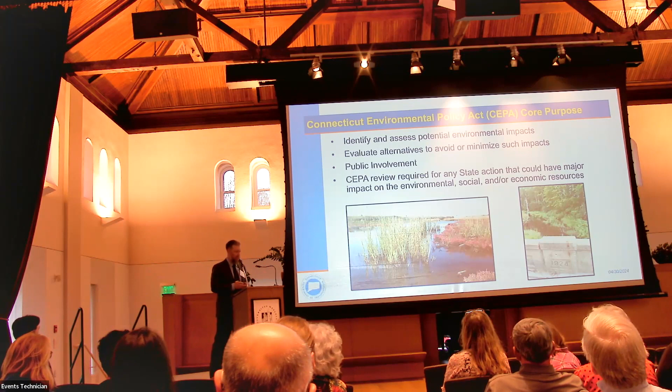All right, so we are here to talk about the removal of the traffic signals on Route 9. This is a public informational meeting. The idea here is to educate the public, but there's something else as well. It's a CEPA scoping meeting, which is the Connecticut Environmental Policy Act. The purpose of this CEPA scoping meeting is to identify potential environmental impacts, evaluate and minimize such impacts, involve the public, and then these reviews are required for any major state action in the state. Some of the impacts we look at are physical, natural, and socioeconomic, such as stormwater, wetlands, recreational resources, pretty much the gamut of issues here.

So again, it's the process of gathering information.

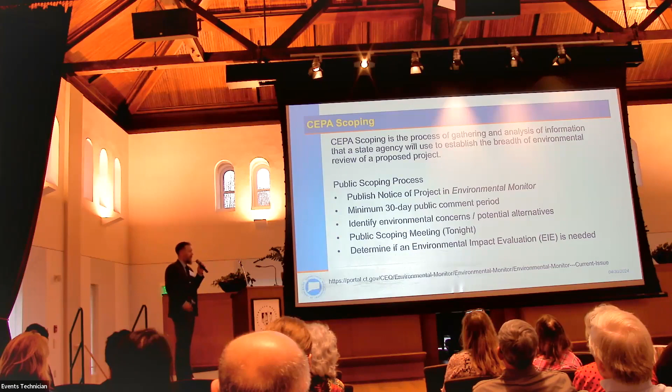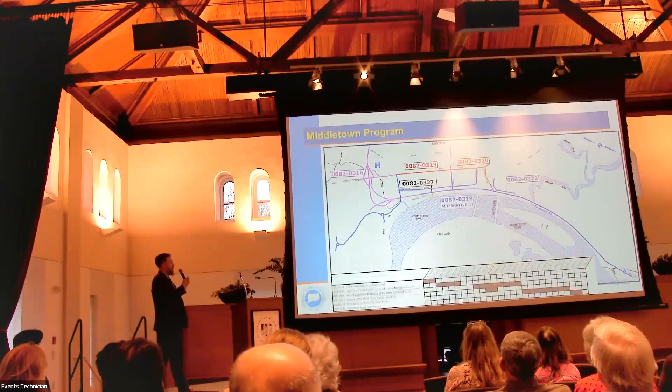So we have a lot going on in Middletown, and have for quite some time. What you're looking at here is all the projects we've had since 2019. Starting with 82319, the red project on Main Street, the sidewalk bump outs on Main Street. We then moved on to 82320, St. John's Square, where we fixed some geometric issues and on-street parking up in the north end. 82316 is under construction right now - that's the Route 17 on-ramp to Route 9 North. What's also just beginning is 82322, the closure of the Miller Street access to Route 9. And what's left is 82318 alternative 11 - a little larger than what you've seen before. Based on our outreach, we've added some limits, including a roundabout further south at Silver Street and a roundabout up north in Cromwell that I'll get into. Below is a quick schedule showing what we've been doing over the years and how we're projecting it out. We're in the middle of construction on the reconfigured Route 17 on-ramp, and hopefully, based on support, this project would follow on the heels of that.

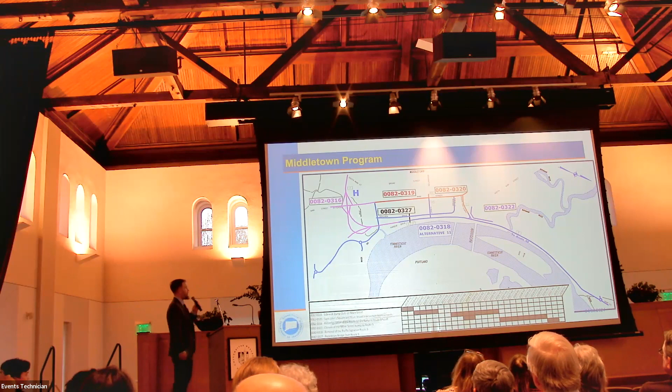So who is the team? My name is Steve Hall, I'm the project manager for this project. I've been on Middletown for 8 years, and was the primary designer for all the projects I just listed, so I've been working on this for a long time. I've lived in the area - I used to live in Middletown. Everyone else you see up here is also part of the team - local people who have been on the job for a while. We've got highway designers and traffic engineers working together. If you see any of these people later on, please feel free to grab them and ask a question.

So what's the purpose of this project? The purpose is to improve safety and reduce congestion on Route 9. The project is needed because the two traffic signals on Route 9 contribute to a crash rate significantly higher than adjacent segments of freeway. There are a couple constraints we have to keep in mind: the proposed design cannot cause regular backups onto Route 9 or cause adverse effects to Main Street. So the goal is to improve safety by removing those signals, but that can't be at the detriment of Main Street or downtown.

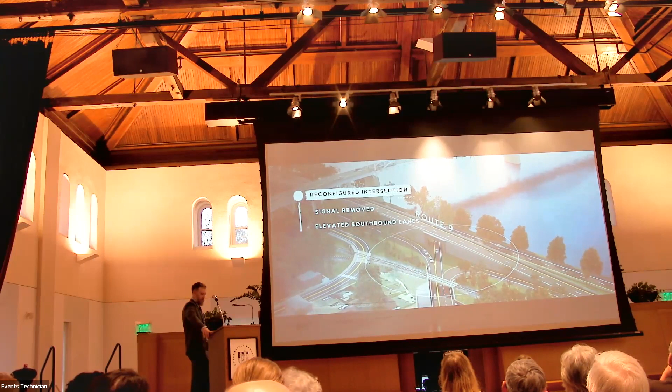Drivers entering northbound Route 9 from St. John's Square will be afforded plenty of time to accelerate to highway speeds, with a new lane extending all the way to Route 99 in Cromwell.

Throughout the network, these design enhancements work together to improve safety for all users, reduce congestion, and create a more efficient downtown. This project, and others like the new pedestrian bridge, will allow a growing Middletown to reconnect with the riverfront and destinations beyond.

All right, so that's the long and short of it, right? But there's a lot more to it. So taking a look at River Road at Route 9, the northbound off-ramp from Route 9. What we're looking at today we'll call this existing, right? This is the construction project under construction right now, this Route 17 on-ramp to Route 9 North. So for all intents and purposes, this is our future existing condition.

What the proposed design will do is add a new alignment off-ramp from Route 9 northbound that will intersect in a three-leg roundabout onto River Road. This roundabout is sized properly to handle any size highway vehicle. It does a tremendous job of naturally reducing speeds and improving safety. I encourage you to look at some of the roundabout information we have elsewhere in the room.

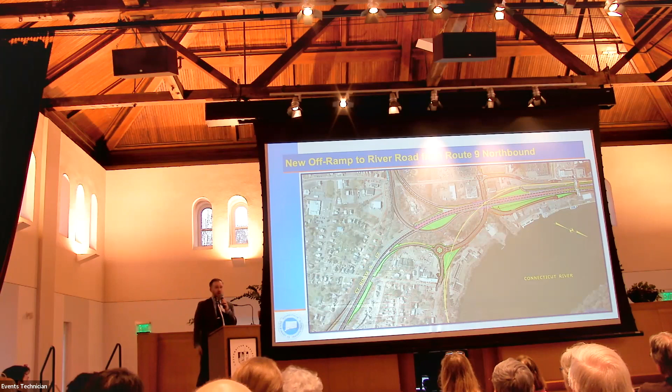From here, we will prioritize the movement off of River Road. There'll be no more stop sign at Harbor Drive, excuse me, there'll be a free flow movement up to Union Street. At Union Street and DeKoven Drive is where they can take a right to go down DeKoven to Rapallo, over the bridge. They can take a right to go DeKoven and Washington to go west, or they could go up to Main Street and use that route as well.

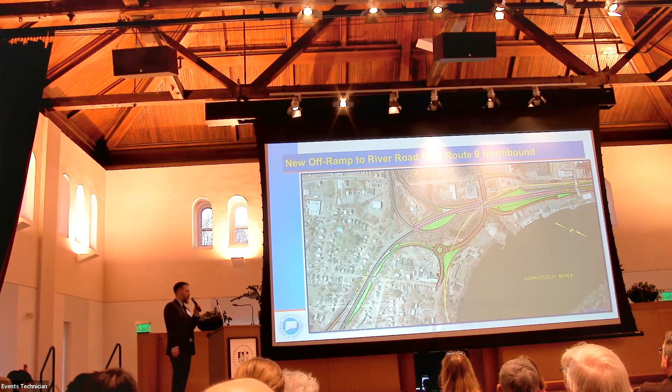This is in a floodplain. The majority of the roundabout is in a floodplain. I'll get into that a little bit later, but there is some mitigation we have to do because of that. And here's just a shot of that rendering.

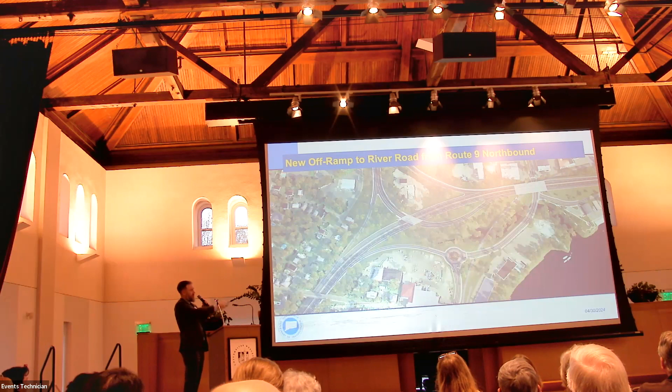So you see we have one rail crossing at the approach coming in from River Road. We've talked to the railroad about this. We've added a second pedestrian crossing actually as part of the construction project right now over that rail crossing to try and encourage and improve the pedestrian connectivity to the riverfront, especially with the development along Harbor Drive there.

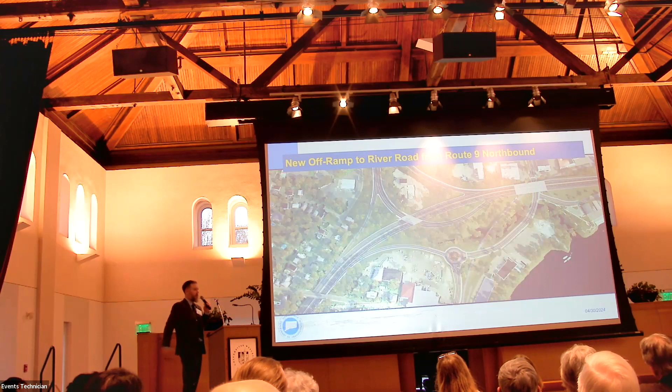As we move a little bit further north, we're looking at the intersection of Washington and Route 9. The area to the left would be part of the current construction project. What we have today is a traffic signal on Route 9, a traffic signal on DeKoven, access from Washington to Route 9 South and from Route 9 North. There's currently no access from Washington to Route 9 North.

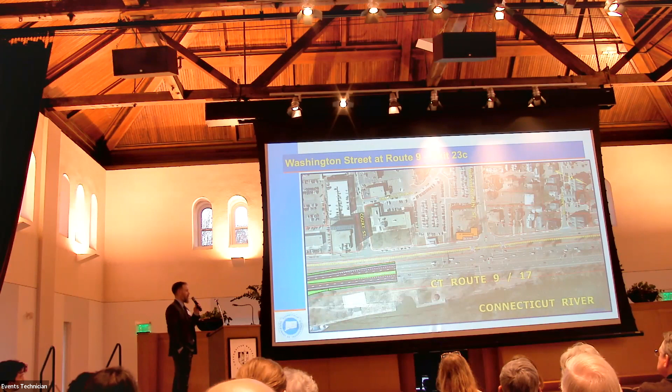We also have a very large rail crossing. There's not a whole lot of movements that cross this today, however the railroad is always talking about increasing operations, and with that wide crossing, it's rather dangerous and becomes a challenge for operations.

So the proposed design here is rather simple. This would be removing that traffic signal at Washington Street. Previous iterations of this design had Route 9 southbound elevated in this region to get Route 9 north underneath. By adding that access further south at River Road, we no longer have to elevate Route 9 southbound. We're now sending vehicles further south to get off of Route 9 north.

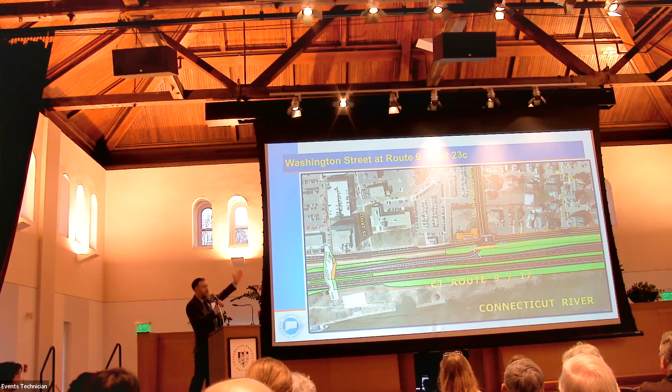So today, cars would take Washington, maybe take a left to go to 66. Now they're going to get off a little bit earlier and take River Road to Washington Street. So this is dramatically simplified. We've tremendously shortened the crossing distance for that rail crossing, and we've maintained that on-ramp from Washington Street to Route 9 southbound. You also see here the pedestrian bridge.

It's an initiated project that has a lot of design work to go, but we've been talking to the city already about how this fits into the downtown area. So more to come on this later.

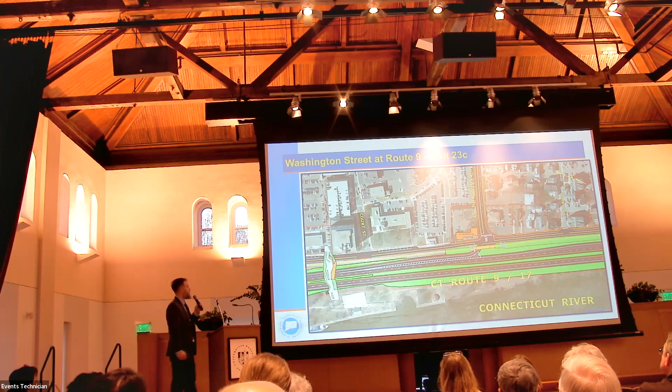And here's that rendering, just showing how much we've simplified the operations. Again, everything is going to be at grade. There's no grade separation for Route 9 south or north of this location here.

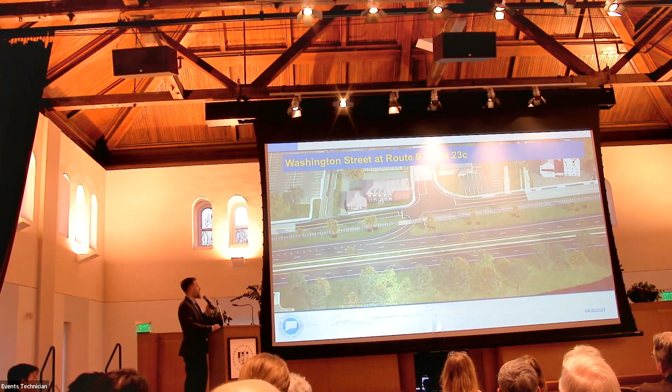A few constraints here that we obviously have: the Arrigoni Bridge, the Connecticut River, a rail bridge. There's a cemetery, a church, a partridge in a pear tree as well.

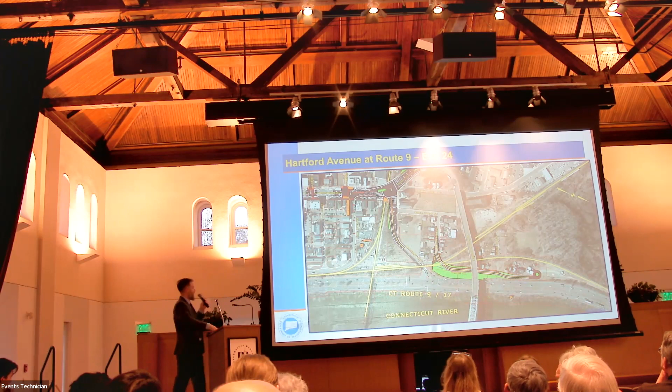So looking at the proposed design, the option here would be to take Route 9 southbound, elevate that up and over Hartford Avenue. So here's where we have that grade separation. This is the same design that you've seen if you've been to a few of these meetings. We've had this design for quite some time at this location.

So it's taking Route 9 south up and over Hartford Avenue, and it's a tie back in before the rail bridge. What this also allows us to do is have a full length deceleration lane for Route 9 southbound that no longer has to stop at that signal and continue all the way up Hartford Avenue to St. John's Square. We are able to maintain that access from Hartford Avenue to 9 South, again, without that signal.

Once a vehicle passes this signal at St. John's Square, that's a free flow movement to 9 South, or it's a free flow movement to 9 North. The movement we're getting rid of here is the left turning movement from Route 9 North. That is really the crux of this entire design: the left turning vehicles heading on Route 9 North. How do they get to the Arrigoni Bridge?

Right now, the most common route will be to take a left at St. John's Square. In order to provide that left, we have to put a traffic signal in there. That signal is where these crashes are coming from. So by removing that left turn, we're removing a lot of those conflict points, making this a lot safer. The question is, can we still convey traffic efficiently by removing the access at Washington and the access at Hartford Avenue? Spoiler alert, we can.

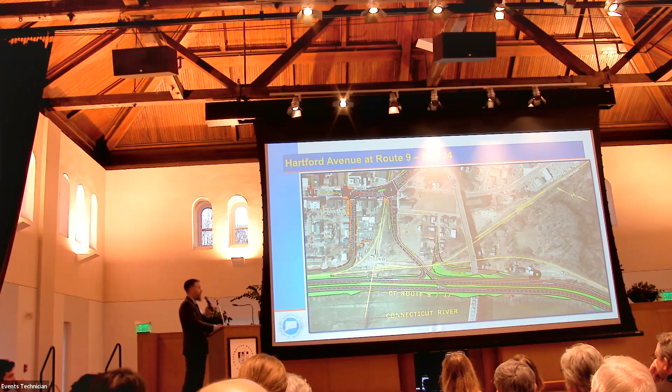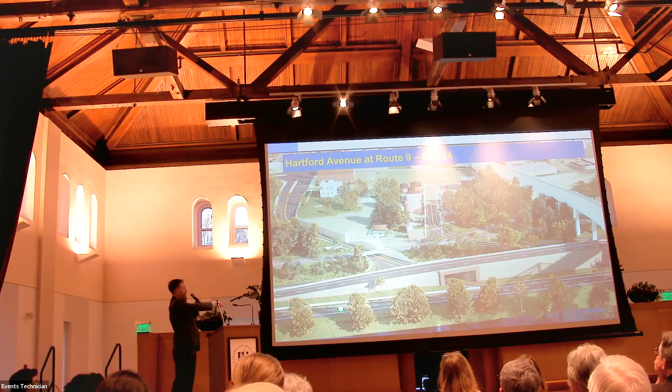We've designed this curve here so that cars are going about 30 miles per hour when they enter Route 9 traffic, and we expect them to be going about 50 miles per hour. So the speed differential of only 20 miles per hour is going to make it a lot safer than situations we have now where someone could blow a red light and T-bone someone coming down.

So where's all this data coming from? How do we know this?

Step one on really any project is traffic volumes. We need to go out there and see how many cars are turning, and where they're turning. We do this while school's in session, over the course of a few days, to try and get a good sample size.

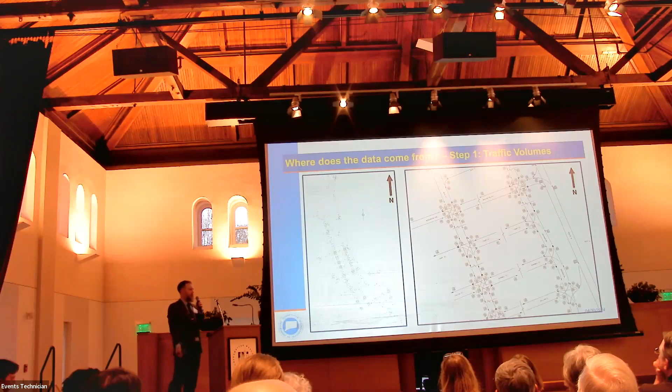However, with a network as complicated as downtown Middletown, simple traffic volumes don't paint the whole story. We can see how many cars are turning left at any of these locations, but we need to know where they're coming from and where they're going, because on any given day you could take three or four different routes to get where you're going in Middletown, depending on the traffic and depending on what color the light is when you drive by.

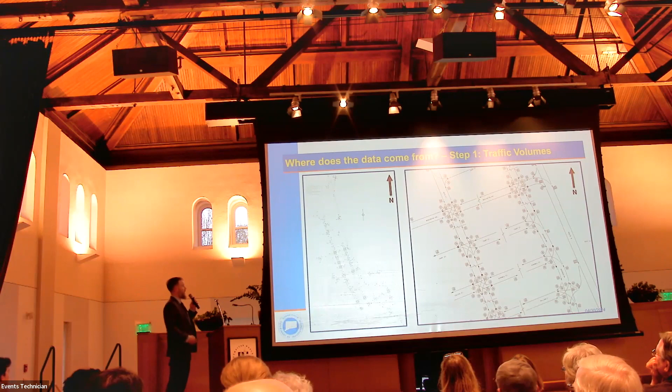So in addition to traffic volumes, we do an origin and destination study. We use open source cell phone data that takes pings off of drivers, and it shows us where they're coming from and where they're going to.

So what we've done here is set up various origins and destinations to reflect the most common travel paths we see, whether it be Route 9 to the Arrigoni Bridge, Route 9 to 66, or Main Street northbound. We also set up different neighborhoods, because some of these trips terminate there and don't go through. The red dots you see are gates, to be a little technical.

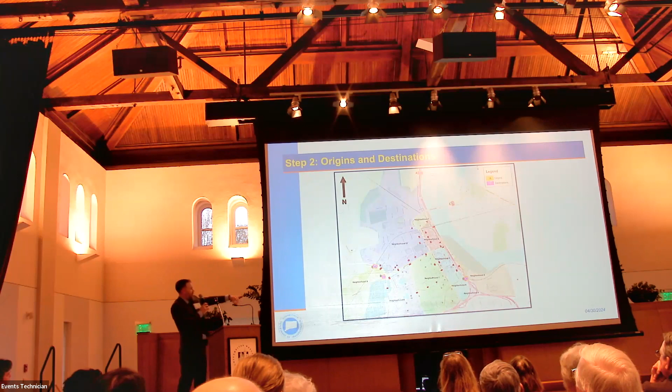This is to see exactly how these cars are getting from point A to point B, not just where they're turning, but where they're coming from. For example, from Route 9 South, they'll get off and take a back road. And we actually see quite a bit of that.

So here's some individual movements from our origin destination analysis. On the left, we're looking at the movement from Route 9 North at Saybrook Road to Route 66 West at Route 3. This would be anyone coming from Route 9 North and terminating at Route 66 West, not necessarily traveling on Route 9 or on Washington Street.

In the AM peak hour, of all the cars on Route 9 North headed for 66 West, 18% will get off at Bow Lane to avoid driving on Route 9, taking the back roads through the local roadway network. Conversely, on the right, we look at the Route 9 North at Saybrook Road movement to the Arrigoni Bridge, the critical movement in this project. Today, of all the vehicles on Route 9 North destined for the Arrigoni Bridge, one out of five in the morning will take Bow Lane to travel down the local roadway network to avoid Route 9, the signals, and the congestion.

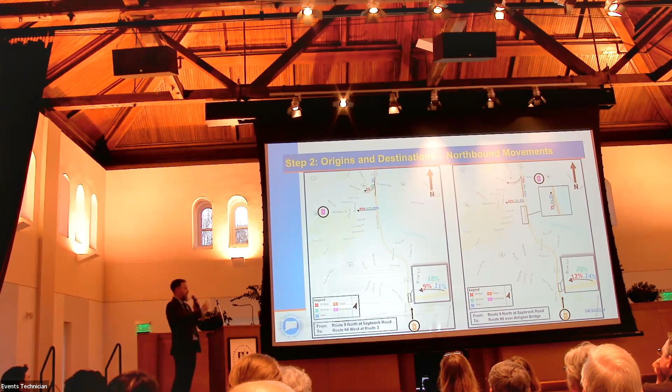So simply getting the turning movements at Hartford Avenue isn't enough, because 20% of those volumes were not captured. We've captured these by finding where they're coming from and where they're going, to ensure that when we have this proposed design out there and the movements change, we've captured all of that demand.

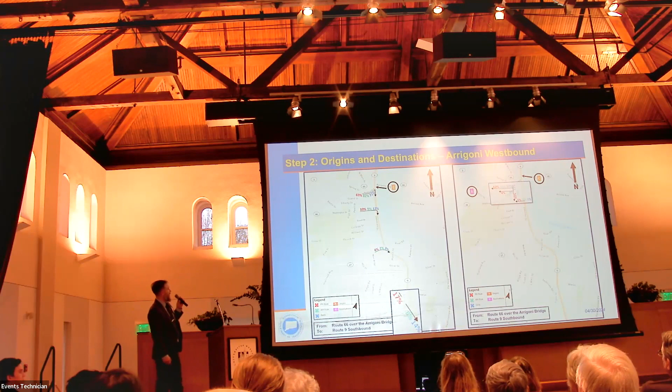There's a few others as well. On the left, we see Route 66 at the Arrigoni Bridge heading to Route 9 southbound. What I found interesting is that 17% in the PM peak will avoid coming over the Arrigoni Bridge and getting on Hartford Avenue, instead traveling all the way down the local roadway network to Bow Lane to get on Route 9 South. We have a tremendous amount of cars avoiding the roads they should be taking because of congestion and crashes.

Additionally, we look at Arrigoni westbound to Route 9 South. That's 62% of the PM peak vehicles that cut through Grand Street. Why are they cutting through Grand Street? They're cutting through because of the congestion experienced over the Arrigoni Bridge and on Main Street, trying to avoid that.

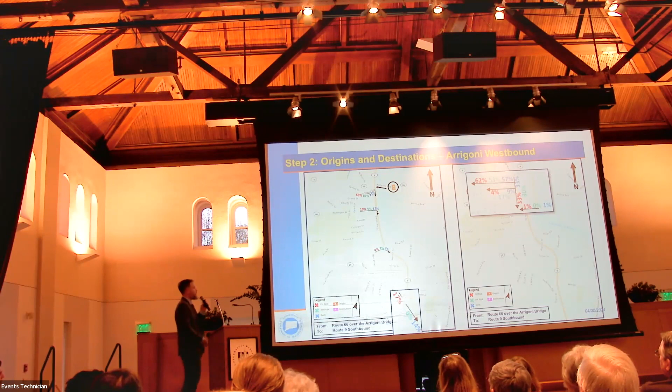So the next step is we build the network. This is the extents of our simulation model. Not much context, but you can see there's a lot of intersections. You see Route 9, 66 West, Arrigoni over the bridge. This grew quite a bit.

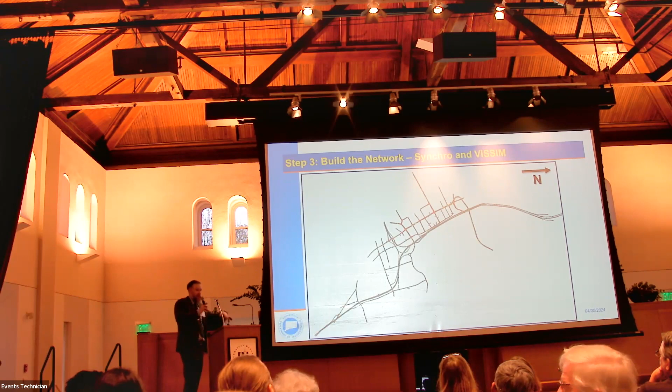We started evaluating the network, and then as we peeled back the onion, there's more and more connections made further and further out from downtown that we had to capture all the way at Bow Lane. So we expanded that quite a bit to have what you have now. We believe this captures all of the different movements that so many residents tell us about, going this way and that way. We believe we've tried to capture all of that.

So the fourth step is to calibrate the network. Not only do we take volumes and get origin destination data, but we put out drones. The purpose of the drones is to ensure that the operations we see out there today are the operations in the model. We were out there for 2 hours, and this is what we saw.

The calibration helps to make sure that before we extrapolate out this model, it actually matches what we observed in Middletown. So we modify it so that it's accurate before we extrapolate that out to account for as many of those environmental factors as we can.

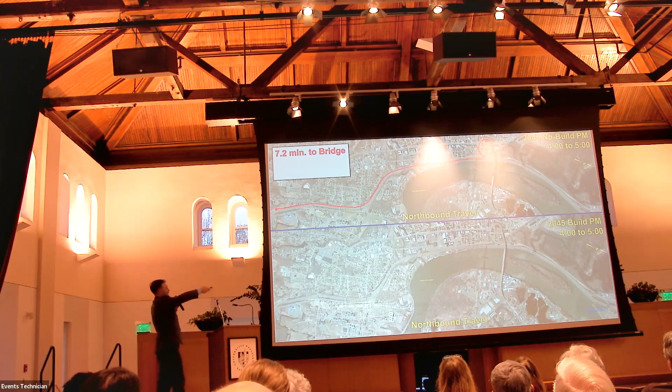Up top you'll see no-build. This red line is the most important route at this meeting, the most important route for Middletown, Route 9 North over the Arrigoni Bridge. This shows exit 24, Hartford Avenue, St. John Square, up and over the bridge, the normal route where the signal is today. In 2045, between 4 and 5 PM, we anticipate that taking 7.2 minutes from this exact spot south of Saybrook Road, up and over the Arrigoni Bridge. That's what the traffic model set up for us.

On the bottom you see proposed. This route has the same origin and destination. We're coming up Route 9 North over the bridge, going through the roundabout. So this is Route 9 North off the new alignment off-ramp, through the roundabout, up Union Street to deKoven Drive, Apollo, over the bridge. That's 7.5 minutes in 2045.

So this is the critical movement, which is why it's actually the worst, just 0.3 minutes added for that critical movement. And the benefit is we remove the traffic signals. That's the thing to remember: a crash every other day, an injury once per week, for 0.3 minutes. That's what we spent a lot of time on, meeting with the chamber, Portland, people, municipalities east of the river very concerned about keeping their access to get over the river.

Additionally, most people wouldn't think of exit 25 as a good route today because you have to travel through 2 signals. But once we remove those 2 traffic signals, this operates significantly more efficiently. So the travel time from that same location south on Saybrook Road, going all the way up to exit 25 in Cromwell, doing a U-turn to come down, go over St. John Square over the bridge, seems like a daunting task today because of the signals you sit through.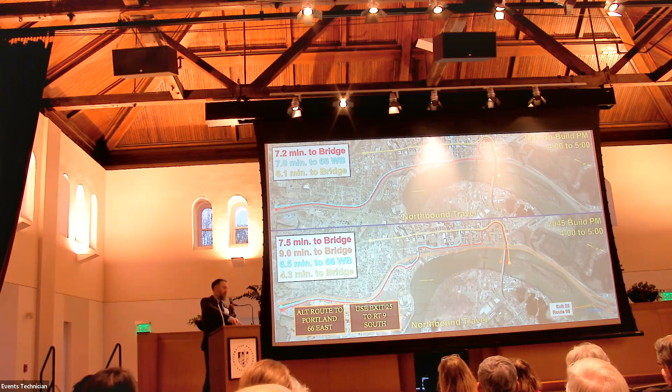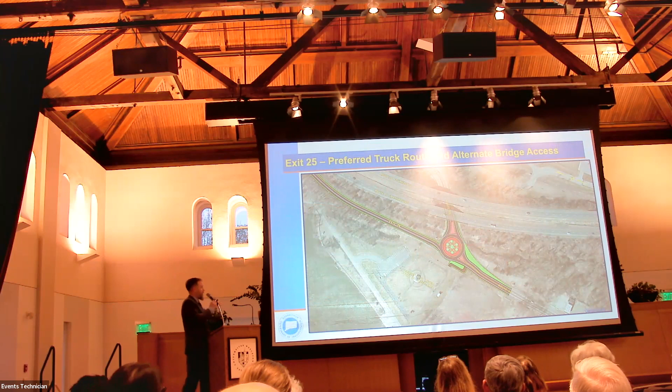So I mentioned exit 25 as a preferred truck route and certainly a route for incident management. This is the existing configuration, just north of the city, just over the line in Cromwell. We have a rather odd intersection that provides access to Route 99 South into Cromwell and then the plant. The proposed design here would be to add a roundabout very similar to the one that we have south of the project. The main benefit of this was to make this a more efficient and safer movement.

So now cars aren't coming to a stop or blowing a stop sign. It does a good job of gradually slowing vehicles, some of the things I mentioned before. And really what this is doing is it's not sending any more traffic into Cromwell. It's just a route where vehicles can take a U-turn, hop right back on Route 9 South, and get up and over the Arrigoni Bridge.

So the roundabout will do a great job of gradually slowing traffic, changing the context of the environment from a freeway. Someone's coming off a freeway and they make this turn. This is a raised center island, planted center island. So a person sees that visual break, not a sign or a flashing sign, but landscaping that says, wait a minute, I'm not on Route 9. And that's one of the big benefits of this, is to help gradually slow them down, change the context from a freeway to a local road.

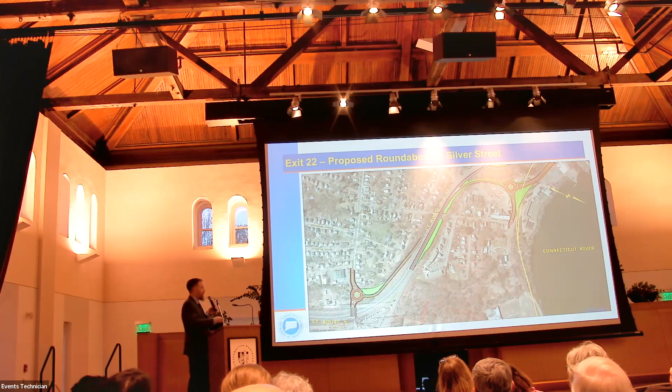So if there is an incident, that we know about it and we can alert drivers by means of variable message signs. You've seen these around the state. We have a good number of these already in place around Route 9 today. So what we can do with this is if we see a crash on the camera, which again is monitored 24/7, we can alert drivers south of the city to say, you're going to want to use exit 25 to Route 99 in Cromwell to get over the bridge. And before they even get off the exit to get into that congestion, they're avoiding that downtown.

We can certainly do the same thing for 4th of July parades and things of that nature as well.

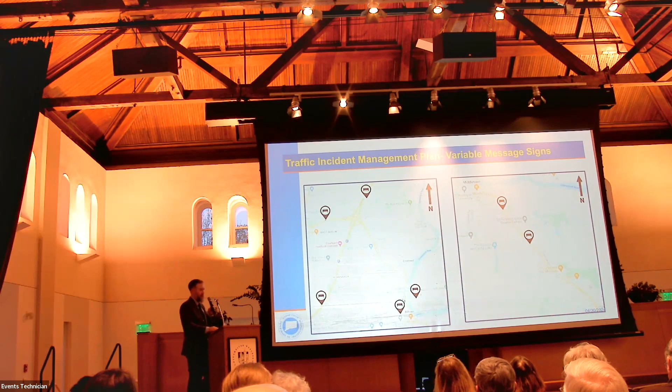Considering we're in a floodplain, we need to balance that out. It's kind of like a bathtub, where if you fill it up and add anything else, it's going to overflow. So we have to find compensatory cut somewhere else, removing that volume so that if there's a flood, we can still have that same capacity. So we are investigating a compensatory cut location owned by the city.

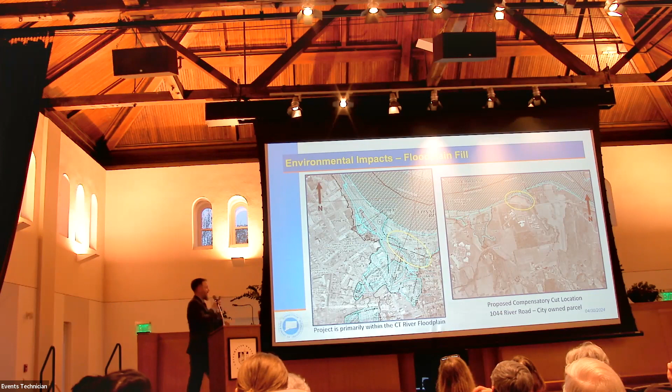We're doing an archaeological survey on it now. All that would be is really removing some material. Probably most people wouldn't notice it, but that's one of the steps we have to do to balance out that floodplain issue.

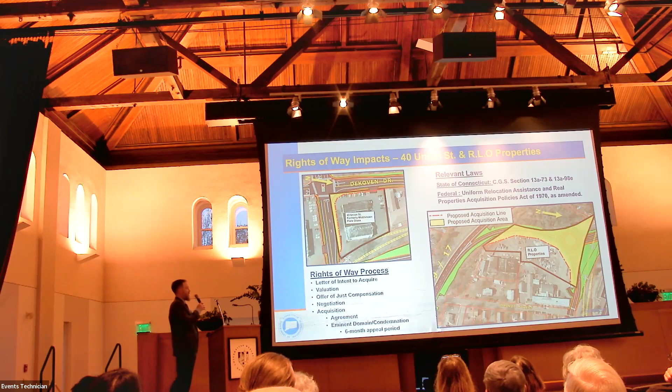Now there are relevant laws we have to follow for this. Connecticut General Statute Section 13A-73 and 13A-98E, and then the Federal Uniform Relocation Act, Relocation Assistance and Real Properties Acquisition Policies Act of 1970 as amended.

That's legal jargon, but what's the process here? The first step would be a letter of intent to acquire. We'll reach out to the property owner, coordinate with them, and then there'll be a valuation of the property, what the department believes it's worth. Then there'll be a letter of just compensation offered to that property owner. If they agree, it's over. If not, there's a negotiation process, which can lead to agreements and certainly eminent domain if necessary.

And there's a 6-month appeal period. We say this and it always scares people, but we talk to the property owners very early on if we're looking to acquire any properties and coordinate with them.

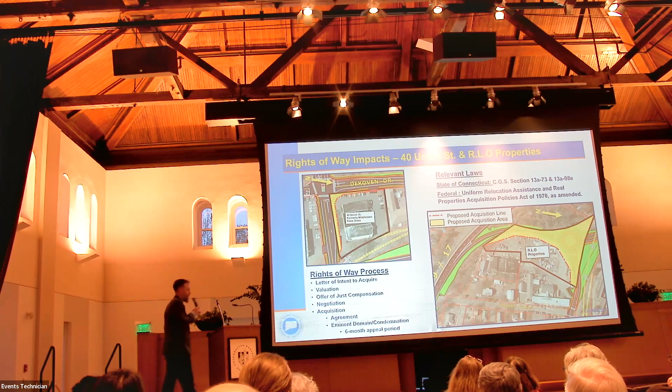So the next steps: based on the support at this meeting, we could seek federal design approval as early as December. There's federal oversight on this project, and the feds want to make sure we cross our T's and dot our I's. So if we get enough support and move forward, we're looking at design approval in December. That gives us another pot of money to do environmental permitting, rights of way, and more detailed design work. Basically it's a checks and balances to make sure we don't go too far with the design until we've really coordinated with the public and got some good feedback.

So construction could begin as early as spring of '27, and it's about 4 years anticipated. 2027 - there's certainly volatility there, that's if things go according to plan. And of course the project out there right now, the Route 17 on-ramp to Route 9 North, we really wouldn't entertain incurring both those projects at once. So this would come on the coattails of that project.

The construction phase is 80% federally funded and 20% state funded, with a current price tag of $143 million. That's certainly gone up - the addition of the two roundabouts and some of what we call mitigation has added to that. We have a comment period until May 16th.